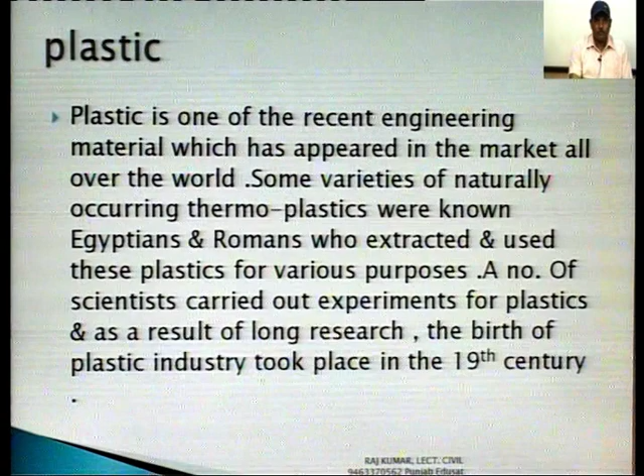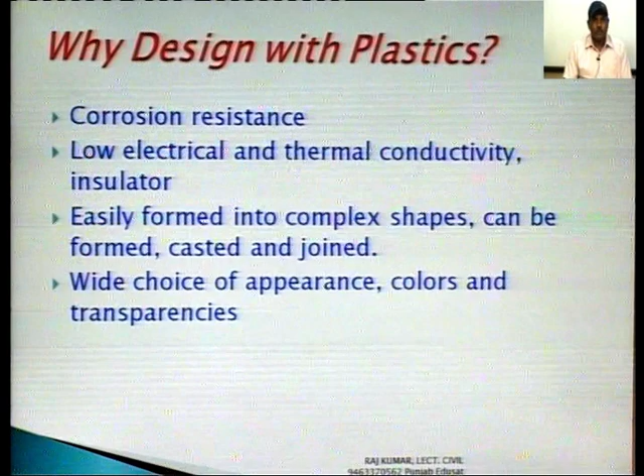Why do we design with plastic? First, corrosion resistance, low electrical and thermal conductivity, insulator, easily formed into complex shapes, can be formed, cast and joined. Wide choice of appearance, color and transparency. Due to this fact, we choose plastic over other materials.

The natural, synthetic and semi-synthetic organic substances which are prepared out of natural or synthetic resin with or without molding compound are known as plastics. Certain molding compounds like filler, plasticizer, solvent, pigment, etc. are usually added to plastic in order to give desired properties to the final plastic article.

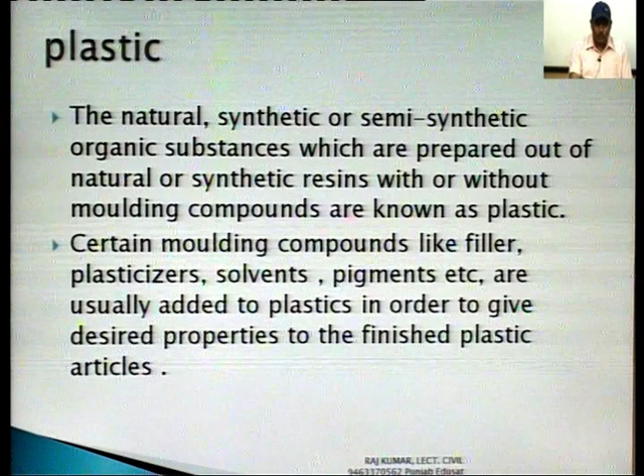In the field of building construction, plastics have been found useful for a variety of purposes, for fitting and fixing, and decorative. These plastics are very much used nowadays. Some important technical terms of plastic. First of all, let us discuss the accelerator. The material added to accelerate the chemical reaction between the different constituents of plastic is known as accelerator. They are also known as catalyst or hardener.

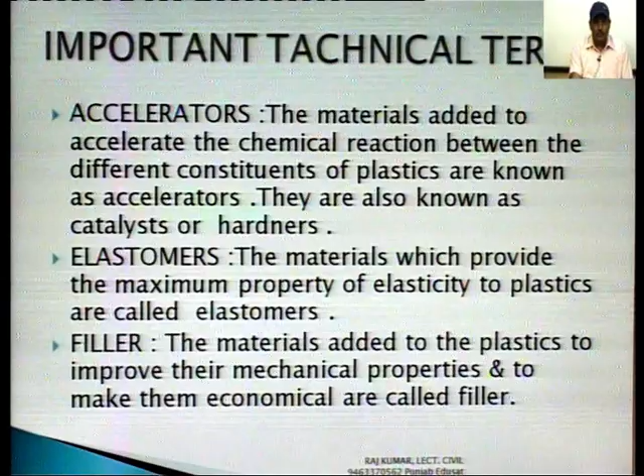The second one is elastomers. The materials which provide the maximum property of elasticity to plastics are called elastomers. The third one is filler. The material added to the plastic to improve their mechanical properties and to make them economical is called filler. The fourth one is plasticizer. The chemicals added to the plastics to make them soft, to improve their toughness at finished stage and to make them flexible are called plasticizers.

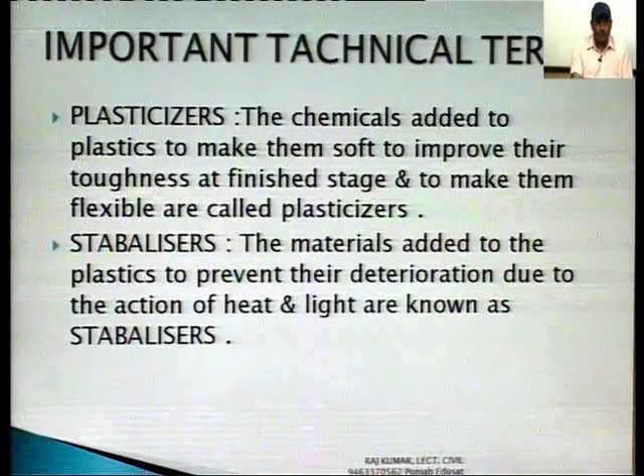The fifth one is stabilizer. The material added to the plastics to prevent their deterioration due to action of heat and light, or to provide stability or increase the durability of a plastic, is called stabilizer. Then polymers. The large molecules formed by continuous addition of basic molecules of synthetic resin are known as polymers. Then polymerization. The process of formation of polymers by continuous addition of basic molecules of a synthetic resin is called polymerization.

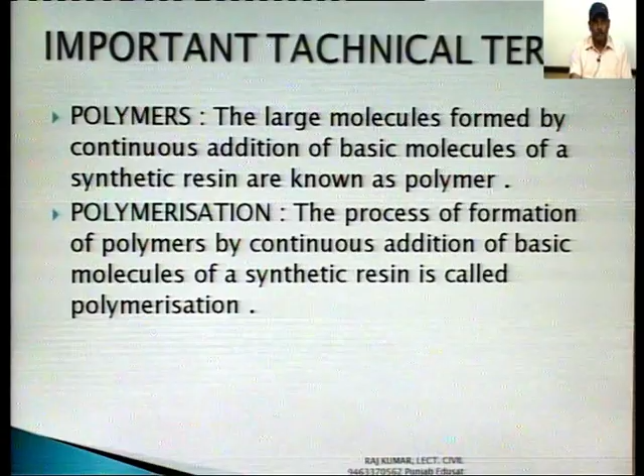Then composition of plastic. In general, it may be stated that plastics are compounds of carbon with other elements such as hydrogen, nitrogen, and oxygen. They are considered as synthetic organic substances which consist of natural or synthetic resin or raw material with or without molding compound. The various molding compounds used in plastic along with their functions are described below.

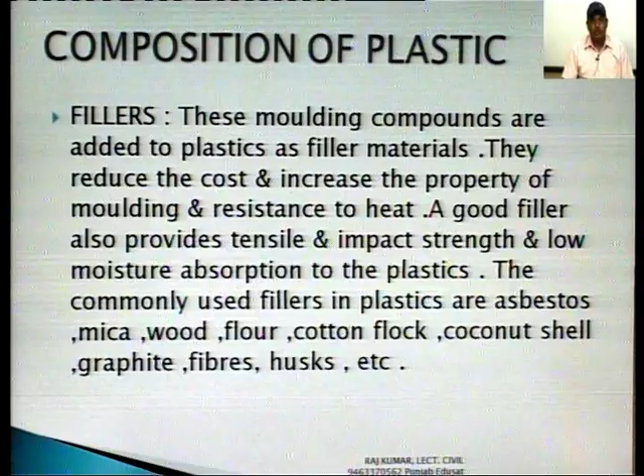Number one is filler. These molding compounds are added to plastic as filler material. They reduce the cost and increase the property of molding and resistance to heat. A good filler also provides tensile and impact strength and low moisture absorption to the plastic. The commonly used fillers in plastic are asbestos, mica, wood flour, cotton, coconut shell, graphite fiber, husk. These are the materials which are used in plastic as fillers.

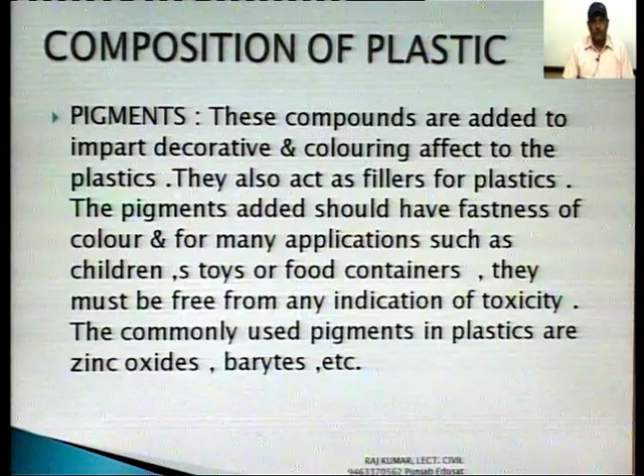Then pigments. Pigment means color. These compounds are added to impart decorative and coloring effect to the plastic. They also act as filler for plastic. The pigment added should have fastness of color, and in many applications such as children's toys or food containers, they must be free from any indication of toxicity. The commonly used pigments in plastics are zinc oxide and barytes. These are the pigments which are used in the plastic.

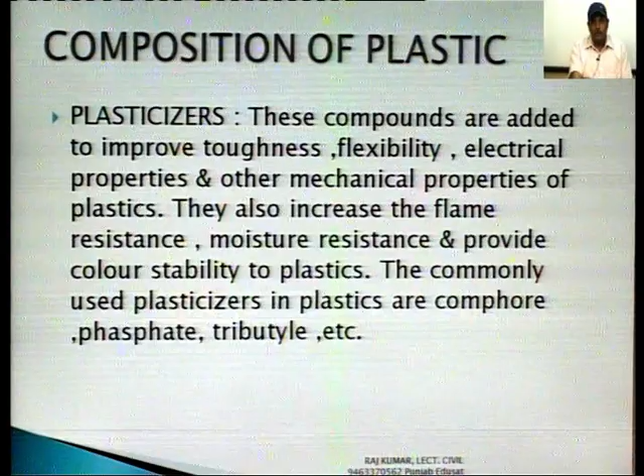Then plasticizer. These compounds are added to improve toughness, flexibility, electrical properties and other mechanical properties of plastics. They also increase the flame resistance, moisture resistance and provide color stability to plastics. The commonly used plasticizers in plastics are camphor, phosphates, tributyl. These are the plasticizers which are used in the plastics.

Then solvents. These compounds are used in plastic for dissolving the plasticizer in such a manner that there will be no future migration of the plasticizer to the surface. For example, alcohol is added in cellulose nitrate plastics to dissolve camphor. Then hardener. These compounds are added in plastic to increase the hardness of the resin.

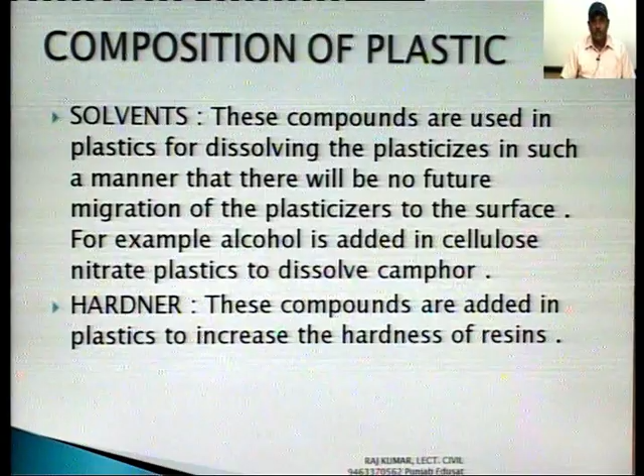Then catalysts. These compounds are added to accelerate the chemical reaction during the process of polymerization of plastic. These compounds also act as hardeners and accelerators. For example, ester is used as a catalyst for urea formaldehyde, which is a type of thermosetting resin.

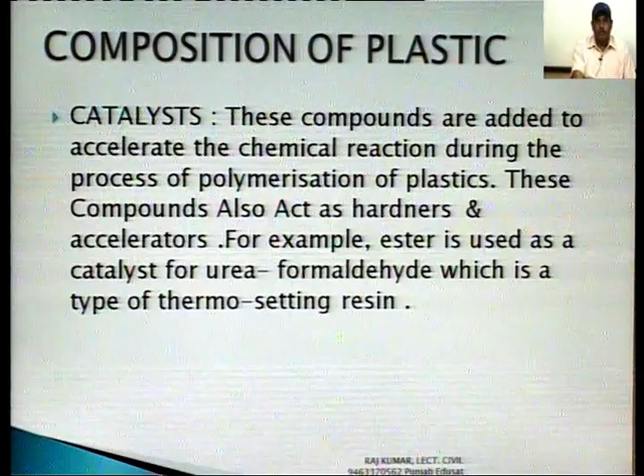The plastics which become harder and rigid when molded at suitable pressure and temperature and cannot be resoftened by heat are called thermosetting plastics or thermoset plastics. In this, heat cannot resoften the plastic if we want to soften it. Some of the varieties of thermosetting plastic are bakelite, durite, duraplex, melmac. These are the thermosetting plastics.

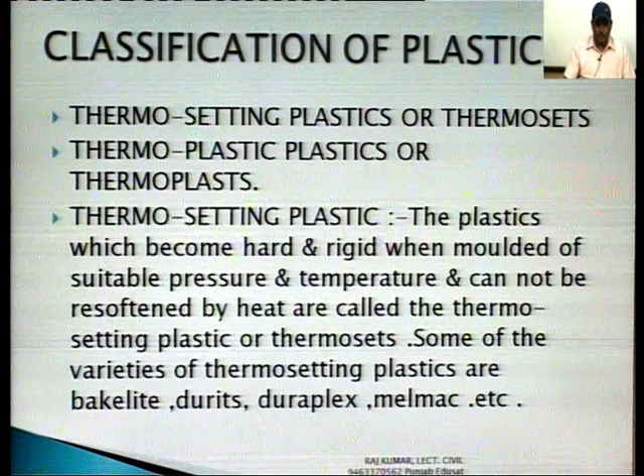Then properties. They are also soluble in alcohol and other organic solvents when they are in thermoplastic stage. They are hard, strong and durable. They cannot be resoftened by heating. They cannot be softened by heat.

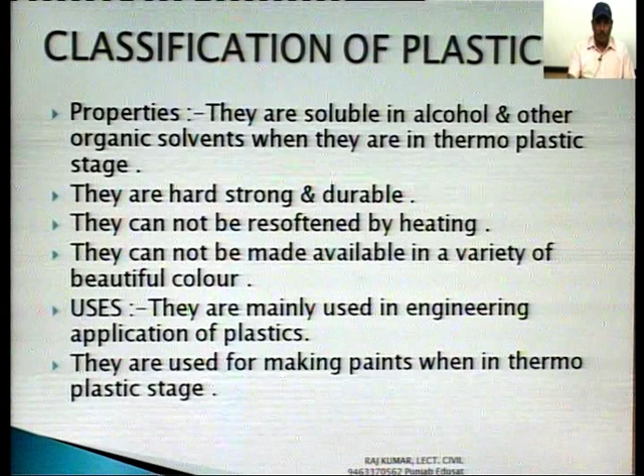They cannot be made available in a variety of beautiful colors. They are mainly used in engineering applications of plastic. They are used for making paints when in thermoplastic stage. Then appearance. Some plastics are completely transparent in appearance; with the addition of suitable pigment, the plastic can be made to have an appearance of a variety of attractive, opaque, stable and translucent colors.

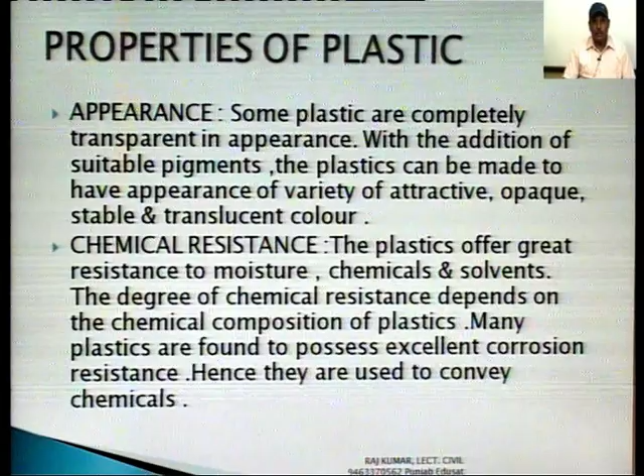Chemical resistance. Plastics offer great resistance to moisture, chemicals and solvents. The degree of chemical resistance depends on the chemical composition of the plastic. Many plastics are found to possess excellent corrosion resistance. Hence, they are used to convey chemicals.

Then dimensional stability. This property of plastics compares quite satisfactorily with that of other common engineering materials. Ductility. Plastics lack ductility, hence their members may fail without warning. Then durability. Plastics are quite durable if they possess sufficient surface hardness. Plastics, especially thermoplastic varieties, are likely to be attacked by termites or rodents, but the damage of such an attack is not very serious because plastics have no nutritional value.

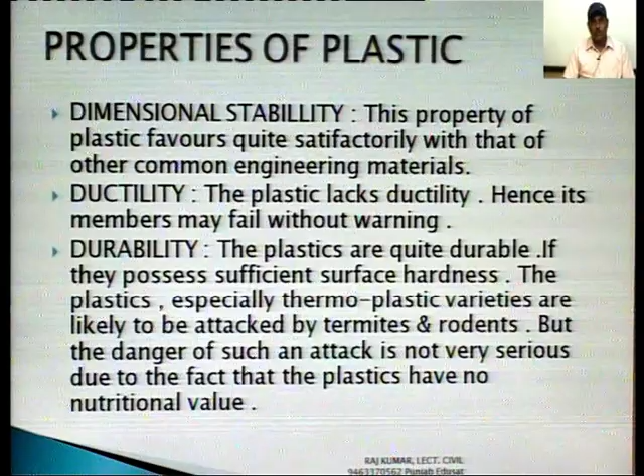Then electrical insulation. Plastics possess excellent electrical insulating properties. They are far superior to ordinary electrical insulation. Then finishing. Any surface treatment may be given to plastic. It is also easy to have technical control during its manufacture. This results in mass production of plastic articles with uniformity of surface finish.

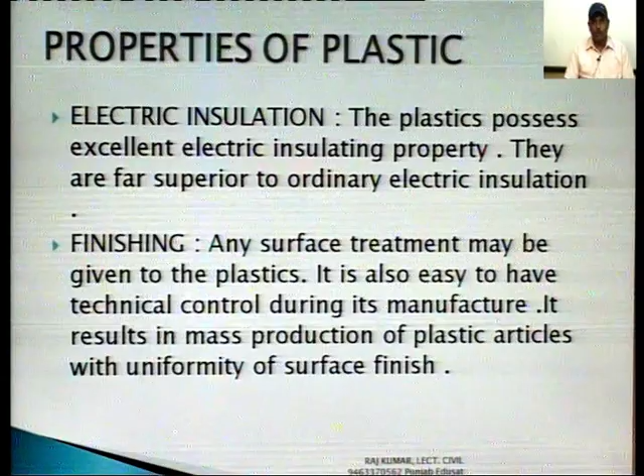Then fire resistance. Plastics are organic in nature, and hence all plastics are combustible, but depending upon the structure, the resistance to high temperature and fire varies considerably among various varieties of plastics. Thus, cellulose acetate plastic burns slowly. PVC, polyvinyl chloride plastics, are known to be non-inflammable. Phenol formaldehyde and urea formaldehyde resist fire, and they are used as fireproofing materials.

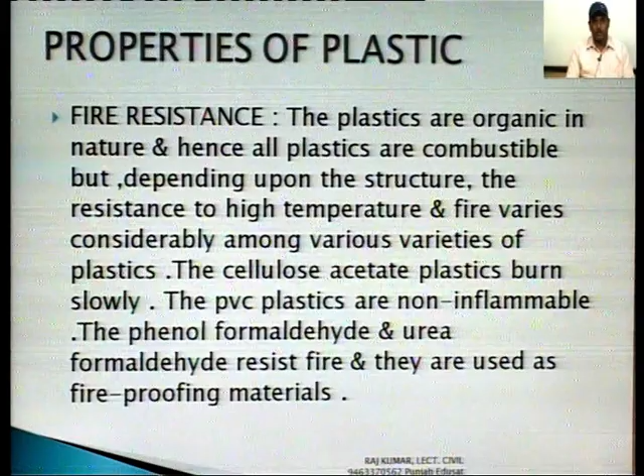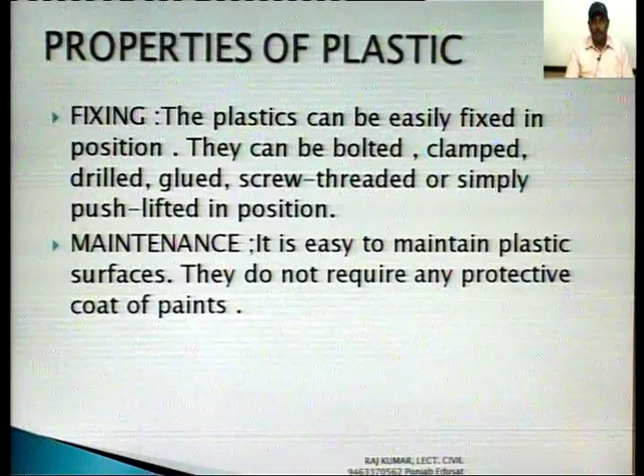Fixing: plastic can be easily fixed in position. It can be bolted, clamped, drilled, glued, screwed, threaded, or simply pushed or lifted into position. Then maintenance: it is easy to maintain plastic surfaces. They do not require any protective coat of paint, etc.

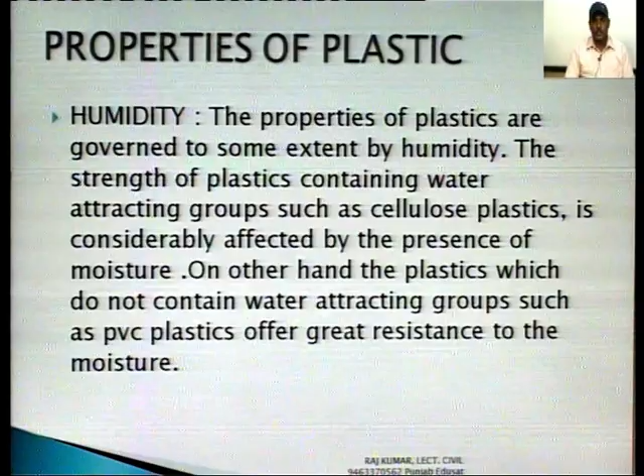Then humidity: the properties of plastics are governed to some extent by humidity. The strength of plastics containing water-attracting groups, such as cellulose plastics, is considerably affected by the presence of moisture. On the other hand, plastics which do not contain water-attracting groups, such as PVC plastics, offer great resistance to moisture.

Then melting point: most plastics have a low melting point, and the melting point of some plastics is only about 50 degrees. They cannot be used at higher temperature places or to convey boiling liquids. The coefficient of thermal expansion of plastic is 10 times that of steel. The thermosetting varieties of plastics are less susceptible to heat than thermoplastic varieties. To improve the resistance of plastic to heat, glass fiber reinforcement may be added to the structure of plastics.

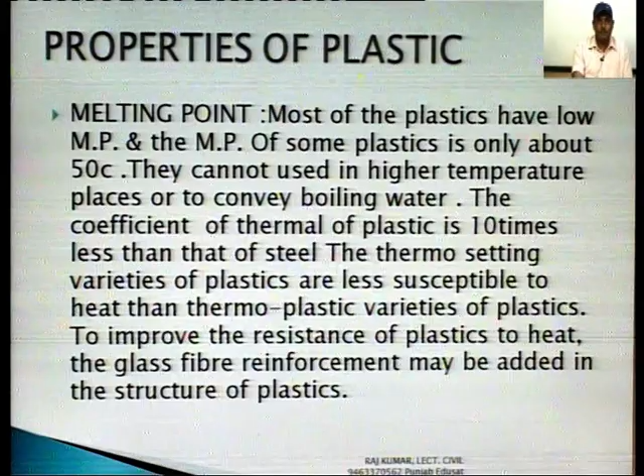Then optical properties: several types of plastics are transparent and translucent. Recycling: most environmentally aware people condemn the use of plastic for the amount of pollution caused in its disposal. However, this is not a serious problem in comparison to the waste and pollution generated by a host of other industries. The plastic used for soft drink bottles, milk and bread bags, etc. can be conveniently recycled into carpet, fencing, etc.

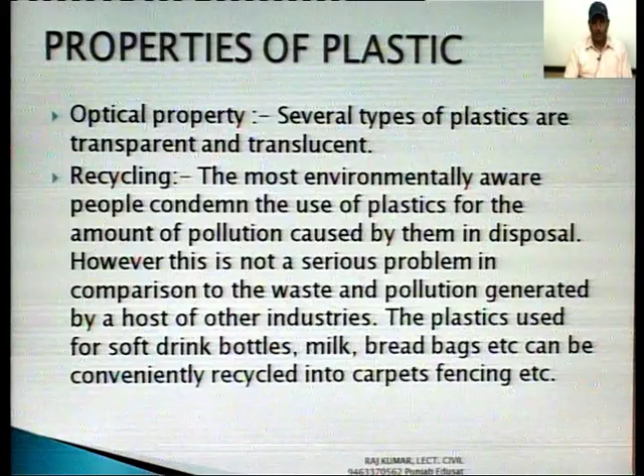Then sound absorbing: acoustic boards are prepared by impregnating fiberglass with phenolic resin. This material has an absorption coefficient of about 0.67. Then strength: an ideal section of plastic for a structural member has not yet been designed. Plastics are reasonably strong. The strength of a plastic may be increased by reinforcing with various fibrous materials. Plastic members can be used as tensile members as their strength to weight ratio in tension very nearly approaches that of materials like steel, aluminum, etc.

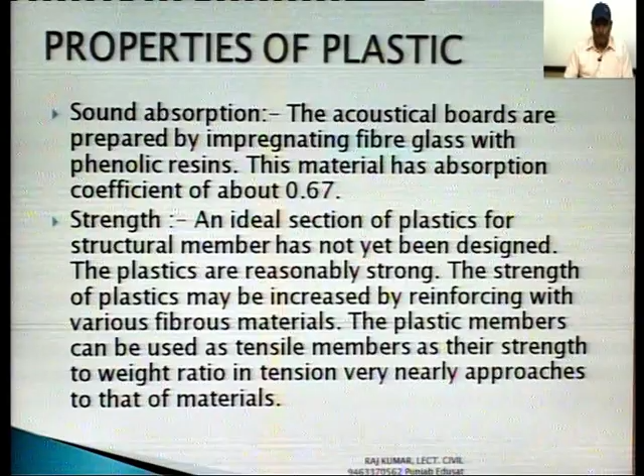But the following considerations are responsible for discouraging the use of plastic as a structural member. Number one, plastics are costly. Plastics are subject to creep under constant heavy loads. The behavior of plastic is very sensitive to changes in temperature. The stiffness of plastic is very poor.

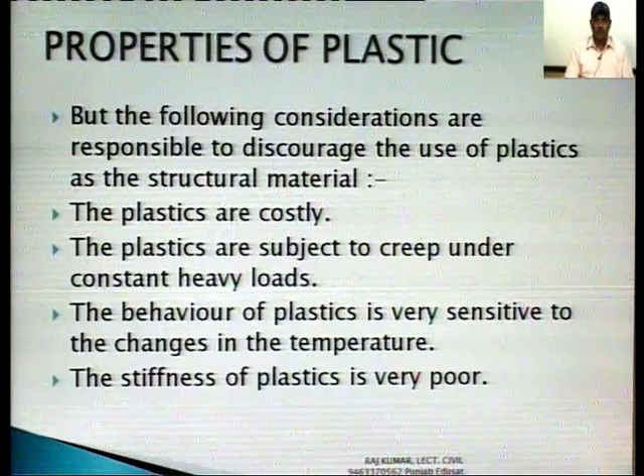Then thermal property. The thermal conductivity of plastic is low and can be compared with that of wood. Foams or expanded plastics are among the leading thermal insulators. Weather resistance. Only limited varieties of plastic can be exposed to weather. The important group of plastics which can resist weather effects is the one prepared from phenolic resin. Certain plastics are seriously affected by ultraviolet light in sunlight. The resistance to sunlight of such plastics can be improved by incorporating filler and pigments which absorb or reflect the ultraviolet light at the surface. Thus, the interior of the plastic is protected.

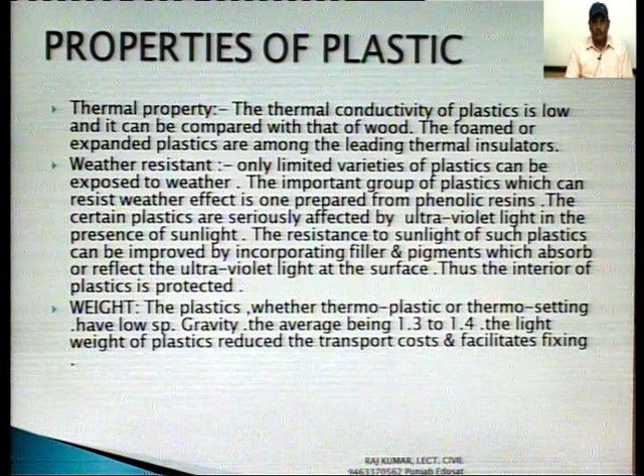Then weight. Plastics, whether thermoplastic or thermosetting, have low specific gravity, the average being 1.3 to 1.4. The light weight of plastic reduces transport cost and facilitates fixing.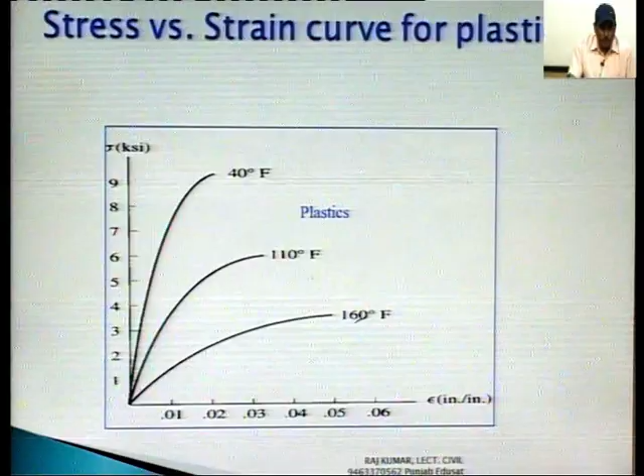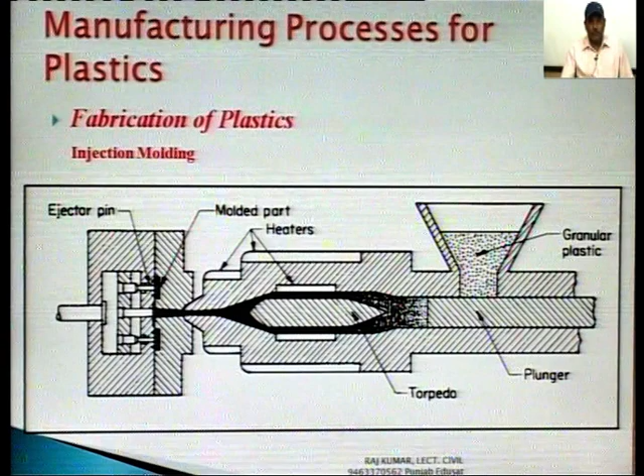The mold is kept enclosed for sufficient time to allow the chemical changes to complete and the plastic product to get sufficiently hard. This molding method is suitable for most thermosetting plastics and a few thermoplastic resins. It is usually uneconomical for producing thermoplastics considering time, cost and cooling the mold. Then this is the molding machine used for making plastic products.

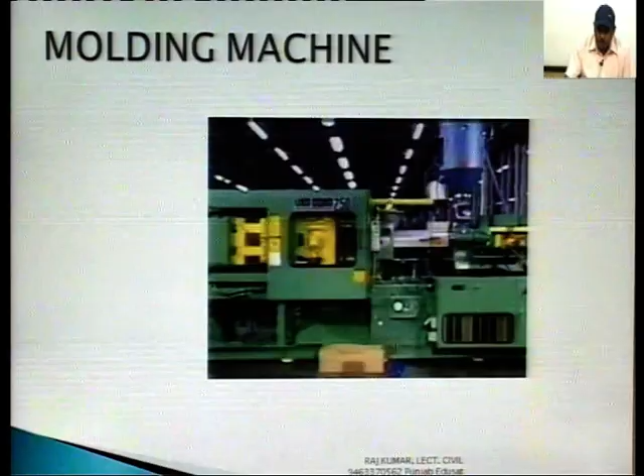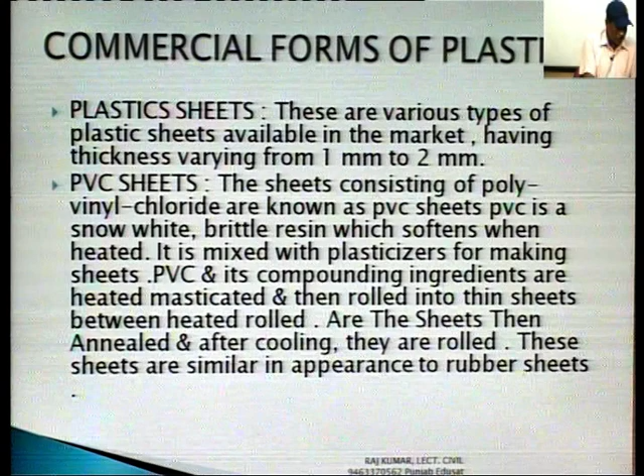Then, commercial form of plastic. First of all, we look at the second type, thermoplastic. Thermoplastics are plastics which become soft when heated and hard when cooled. The property of thermoplastics: they can be molded into any form by the application of heat and pressure. They can be resoftened by heating.

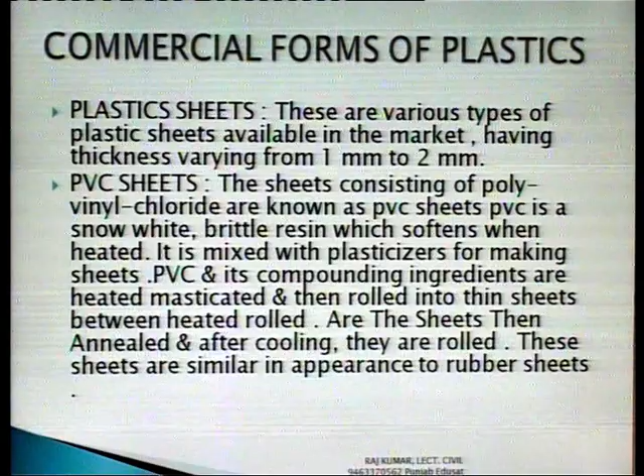PVC is a snow white brittle resin which softens when heated. It is mixed with plasticizer for making sheets. PVC and its compounding ingredients are heated, masticated and then rolled into thin sheets between heated rolls. The sheets are annealed and after cooling they are rolled. These sheets are similar in appearance to rubber sheets. The thickness of PVC sheets is generally kept 1 mm for economy, as such thin sheets can resist the effect of grease, solvents, wear, etc.

These sheets can be made in a variety of clean, bright colors and marble effects. Since these sheets show considerable expansion when wetted, they should be laid only on dry surfaces. Suitability: these sheets are used as a protective cover to resist heat for domestic purposes, flooring, etc. B. Fabric back sheets.